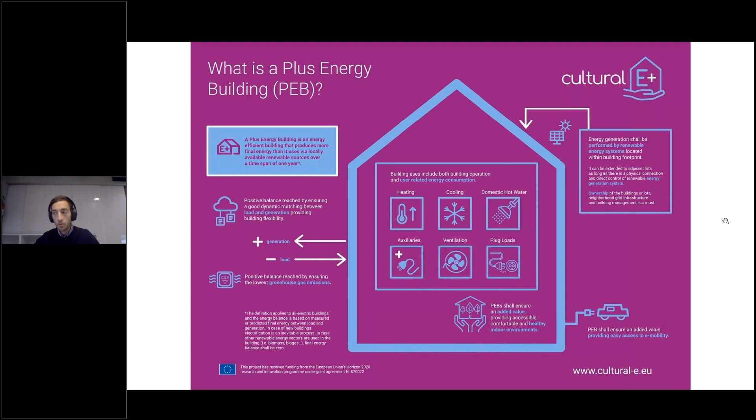Moving forward, you will hear in the next presentations, and in the project in general, about the geoclusters. What we mean by that is the subdivision of the European Union area into four geoclusters, a division to simplify and represent the entire territory, not only according to the diversity of climatic conditions throughout Europe, but also taking into account cultural and social aspects.

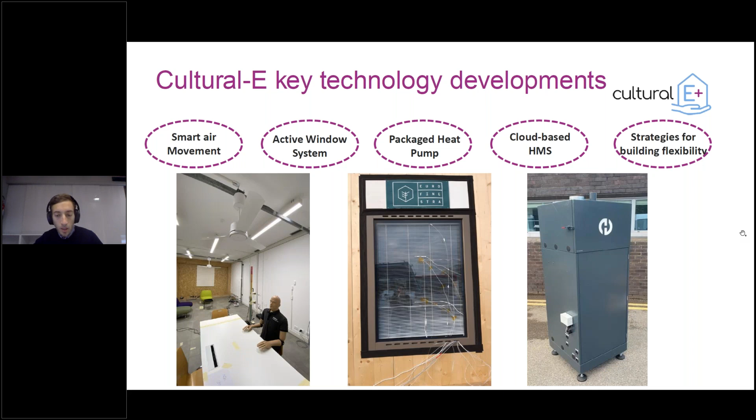I will go through them very quickly to give you an idea of what we mean. As you see, it's very intuitive. By smart air movement, we mean the possibility of using simple technologies like ceiling fans, but in a smart way, controlled by smart, innovative algorithms that can change the speed of these fans so the user inside can be comfortable even at higher cooling set points than usual in summer conditions.

We ran tests in our laboratories using mannequins, real people, and also simulations. There was clear evidence that it's possible to use these technologies to really decrease the cooling need by having a higher acceptable cooling set point. So this was one of our key technologies considered in the project.

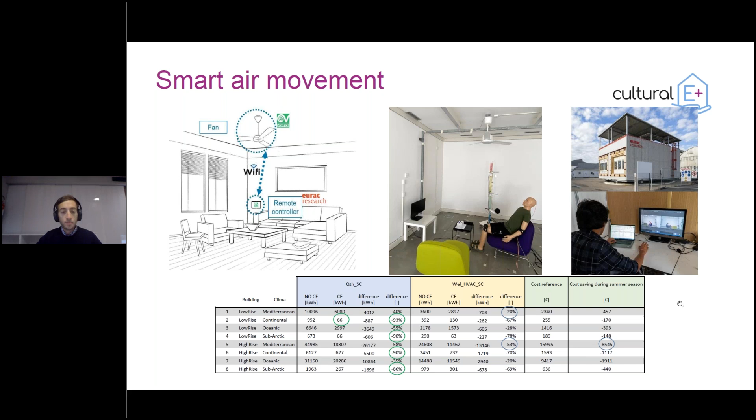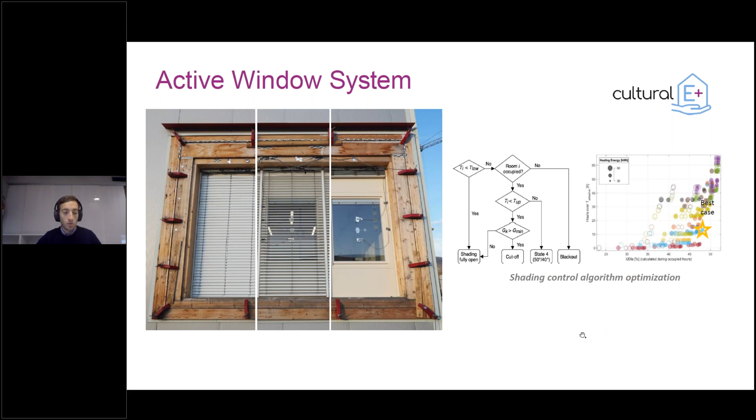This was really helpful because by managing it in a smart way, it's possible to lower consumption while ensuring good comfort conditions. But our active window system isn't only able to control solar gains — we also considered, as you see here, a couple of configurations, though there are many other possibilities, in which we take advantage of the cavity to preheat air or provide fresh air within the indoor environment, using passive technologies like trickle vents or natural ventilation, or active ones like ventilation machines.

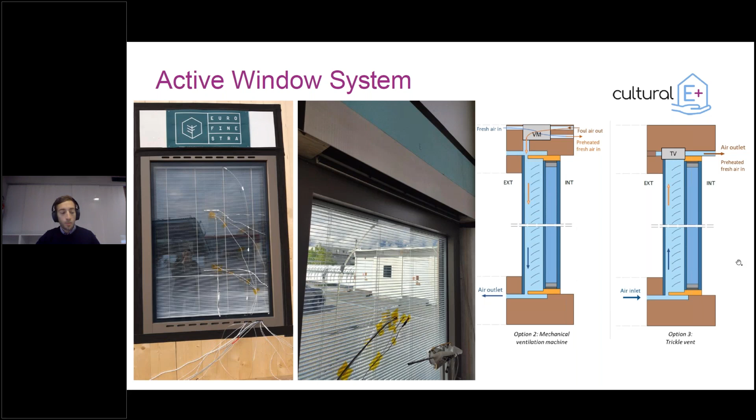This is very tricky to simulate and know how it will behave. So what we have done is actually build prototypes. We now have this prototype installed in our Eurac laboratories, and we are testing them, measuring temperature and heat fluxes to understand the real performance of this kind of active window system in a real environment. This was another of our key technologies to push a bit more the behavior of the windows.

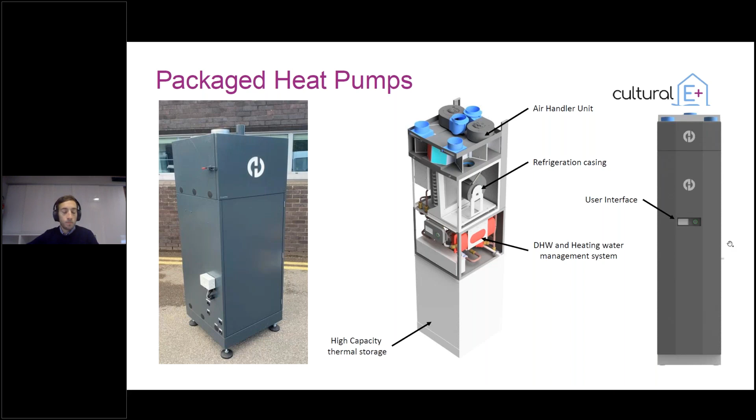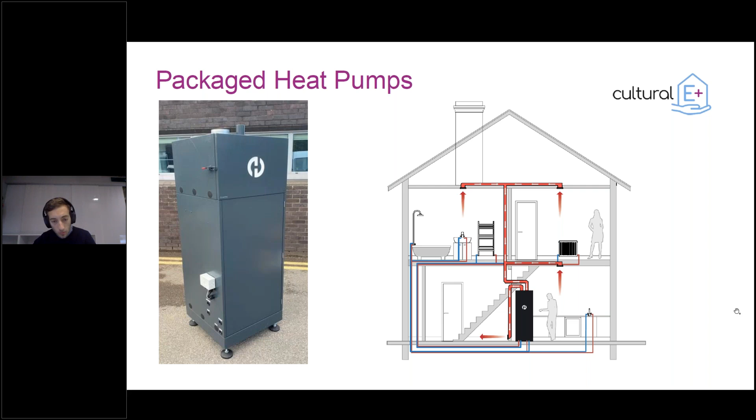Then the third technology considered is the packaged heat pump. This one is more intuitive to understand. It's a heat pump in a very compact manner that can serve a household, providing domestic hot water, heating, cooling, and ventilation — taking care of everything needed within a household, and packaged so you can use one unit and install it in a single apartment or household. It's a very nice solution for decentralized HVAC and production of hot water.

Apart from that, maybe more intangible but very important, we also consider the cloud-based house management system and building flexibility. The cloud-based HMS is a house management system with enhanced capabilities. Being connected to the cloud, it's possible to share more information among the different technologies and also retrieve information from the internet — think, for example, about weather forecasts. So it can be a very powerful tool to better manage the building.

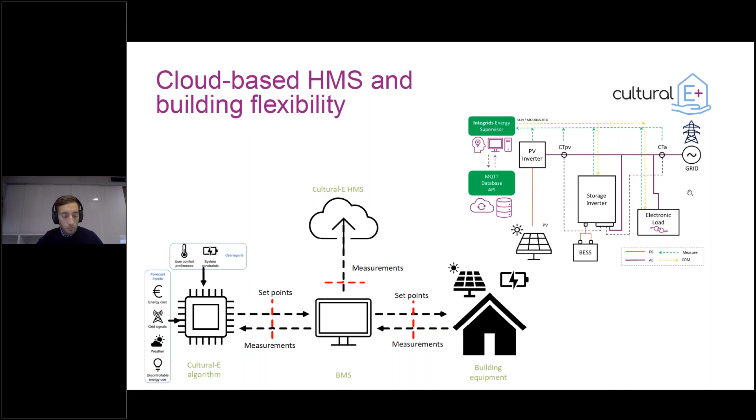So these are the five main key technological solutions we considered. And when we talk about solution sets, that is no other than a set of these technological solutions among others, because these are the key ones on which we focused. But of course, then we also needed to take into account the other solutions, such as the PV production itself, the thermal energy storage, the battery energy storage, the more traditional HVAC system or mechanical ventilation.

But you have to imagine that all our key technological developments, plus all the other needed technological tools to control our building, needed to behave in the best possible way. So each one has to have its own controller and control strategy in a way that it works properly, but also to interact and communicate with each other in order to behave in a holistic way, in the best way possible. So that's why we talk about solution sets. So having a set of technological solutions that work together to provide the best possible comfort condition with the minimal energy consumption.

And that's why also in the next presentation, Francesco Turrin is going to talk to you not only about the solution set and the simulation we have carried out to foresee what can happen in these buildings, but also about harmonized control strategies. So control strategies that can have all these technological solutions work in the best way possible all together.

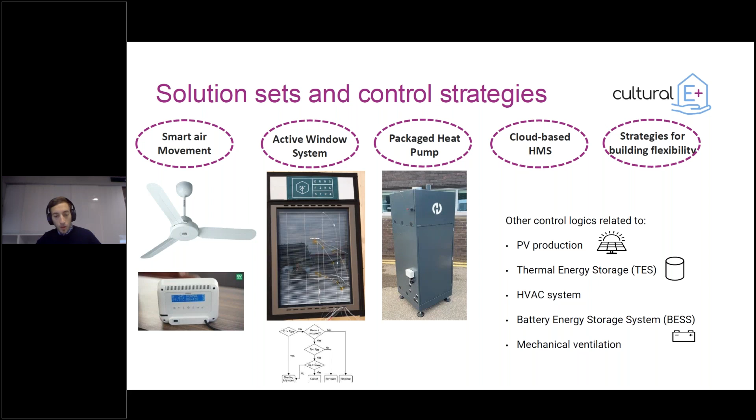So I would like to close. So yes, just a brief reminder about the next presentation. As I said, Francesco Turrin is going to present to you more in detail what we have done to simulate the energy performance of some archetypes, but also how we developed harmonized control strategies to have all these technologies work together in the best possible ways. And as introduced before, afterwards you will also hear about LCA, LCC, and new business models.

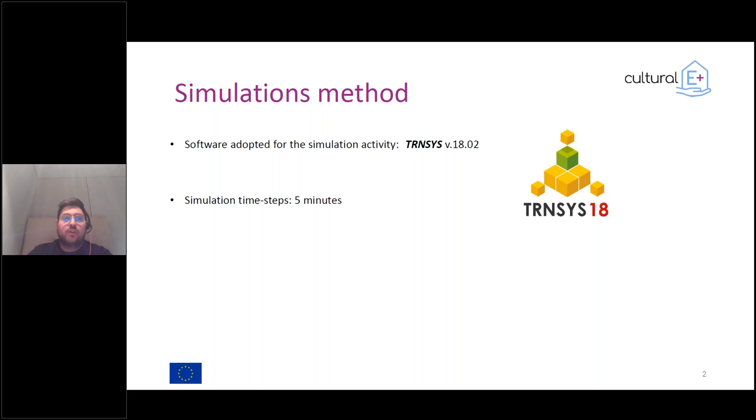Okay. In the project, we consider two reference buildings as building archetypes. On one side the low-rise building, which is a building with 3 floors and a net area of about 650 square meters. On the other hand, we have a high-rise building which has 7 floors and a net area of roughly 3,000 square meters. To consider different geoclusters, we considered different thermal transmittance values for both external walls and the windows, and these coefficients come from the laws of the specific countries.

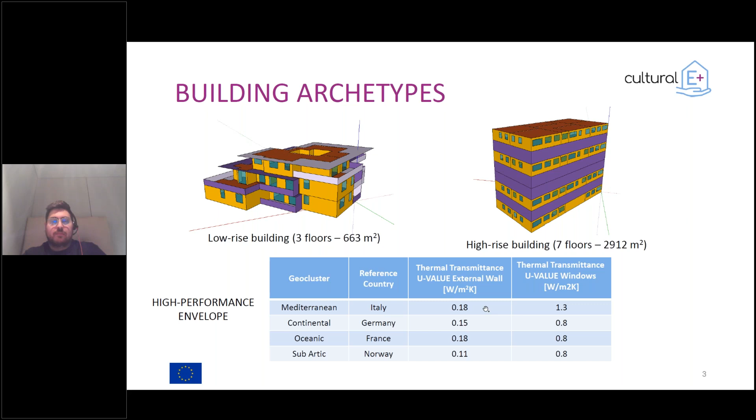The results you will see only represent this solution set, which is a centralized air-to-water heat pump system with all the technologies already presented included in the simulation. So we have a centralized air-to-water heat pump that provides domestic hot water, space heating, and space cooling. The heat pump is connected to either a thermal energy storage for domestic hot water or a smaller buffer for space heating and space cooling. As emission units, we consider fan coils, then we have ceiling fans for air movement, a decentralized ventilation system, Venetian blinds as shading system, then we have the PV with its batteries.

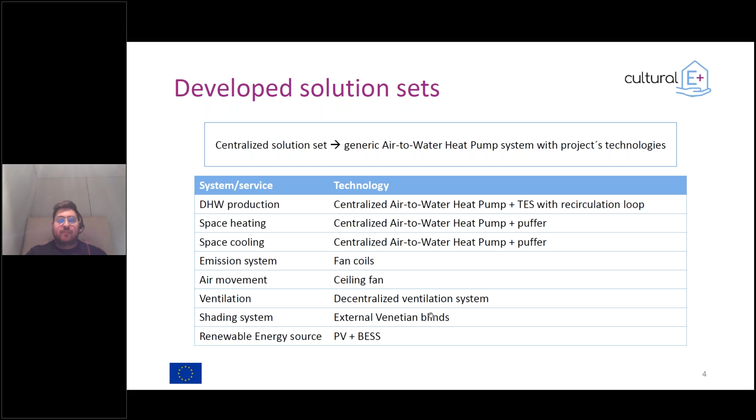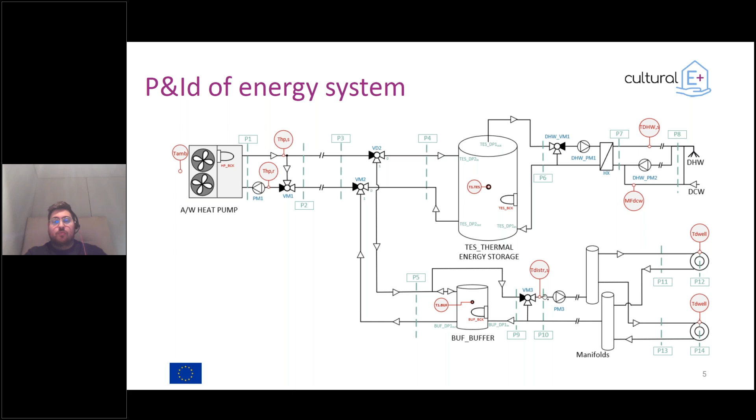So this is what the P&ID looks like. We have the heat pump, which feeds both the thermal energy storage for domestic hot water and the buffer for space heating and space cooling. For the domestic hot water distribution, we have a heat exchanger which allows us to decouple the primary circuit from the secondary circuit, and this helps in reducing the risk of Legionella while keeping a temperature which is not that high in the thermal energy storage. For the space heating and space cooling system, we only have technical water, so we don't see any heat exchanger, but we have a mixing valve which allows us to define the distribution temperature.

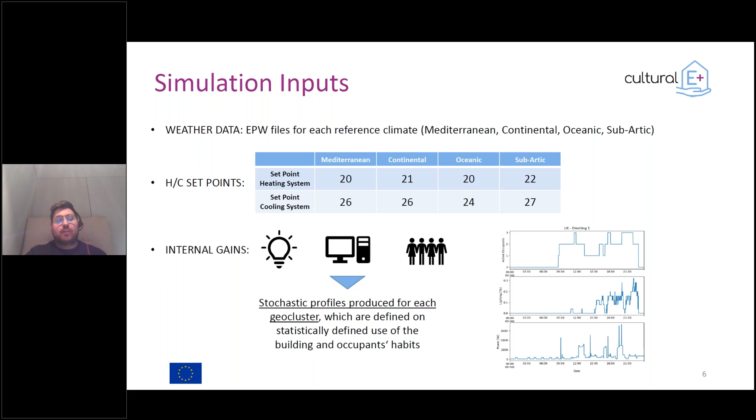For what regards other boundary conditions, we have the weather files, which were taken from EnergyPlus weather files for each reference climate. We had to define some set points for the different geoclusters, and those parameters were provided to us by the partners. While for what regards the internal gains, so for internal gains, I mean the consumption we have due to plug loads, lighting, and the occupancy profile, they were created according to stochastic profiles.

Okay, so talking about the control strategy, our goal was first of all to find a way to harmonize different components. Meaning that each component, like the ventilation and ceiling fans and whatever, has its own control, which is included in the component itself. And all these different control strategies should be taken together to create a unique control strategy that works in every condition. Then, of course, we have to guarantee the thermal comfort and air pollutant comfort for the user.

We should also be able to adapt to some variation imposed by the user. For example, what happens if a user wants to open a window? So how does the system react to this change in the boundaries? And then we also try to optimize the system performance and to shift the load in order to be sure that we were able to match renewable energy sources production and the consumption of the building.

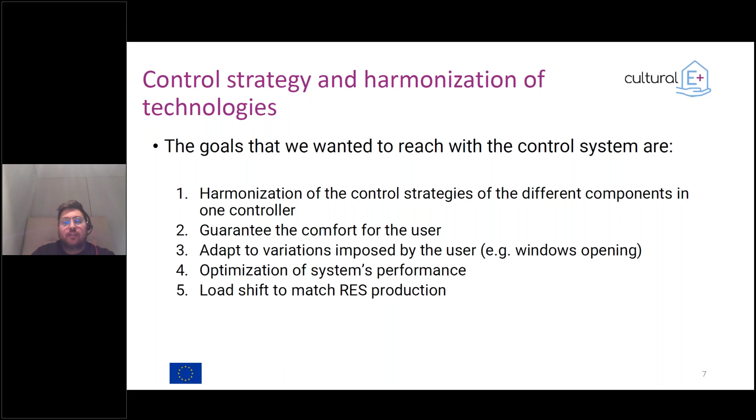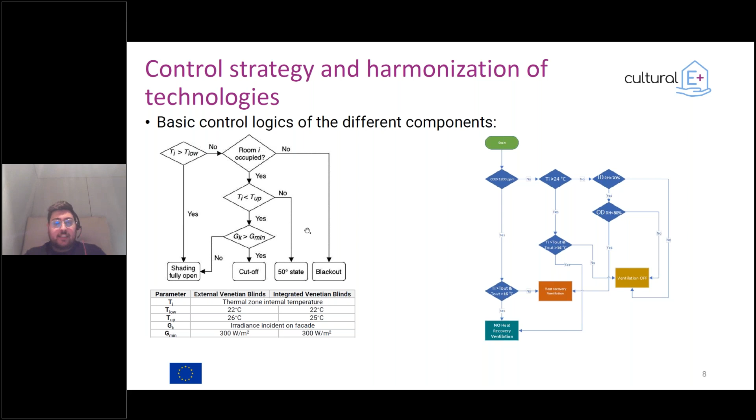Okay, so as I was saying, we have different components within the system which have their own control strategy. So here you have two examples, for the ventilation on the right side and for the shading system on the left side. So what we can do is to implement a centralized controller that takes, on one side, all the information coming from different sensors, and on the other side, we have both the provided control signal and the feedback signal. So the controller should be able to combine what is on the sensor side and what is on the different component side and try to understand what is the best thing to do.

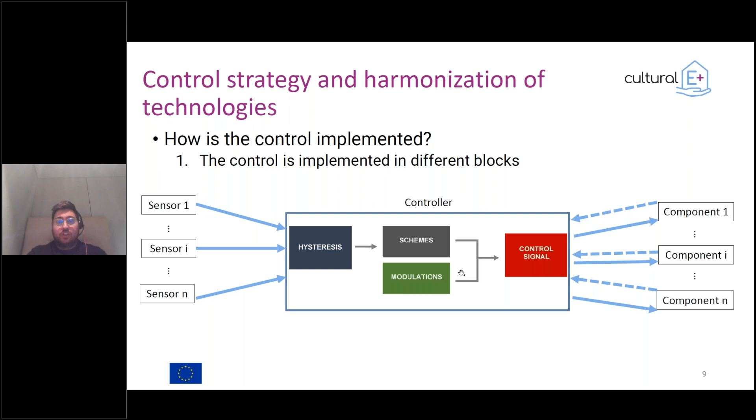The controller itself, it's nothing fancy. So we have a block-based controller, which has hysteresis, schemes, modulation, and finally control signal. So what happens is that once we have all the signals coming from the sensors and the different technologies, we can combine those with some thresholds to define what is the actual status of the system. And by combining those hysteresis, it is possible to define different working schemes. For example, the heat pump should work to produce domestic hot water rather than space heating or space cooling.

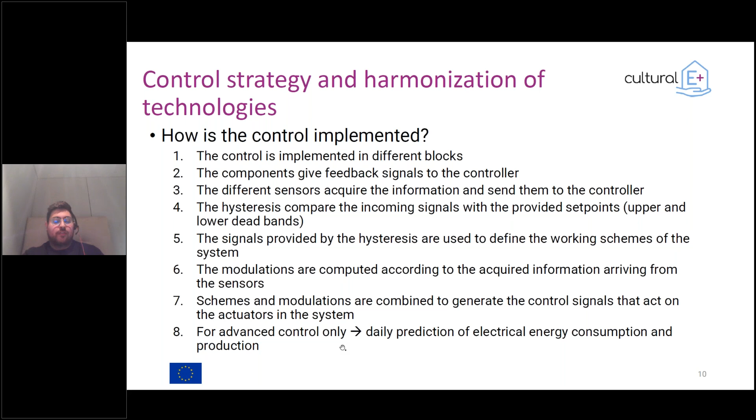And this is not sufficient because we also need to modulate. So each component must modulate, like for example the pumps, valves, etc. So by combining the modulation with the schemes, we are able to define what is the control signal to provide to the component. And a further step that we did is that we tried to predict what is the electrical consumption and the electrical production of the building and the PV system for each day.

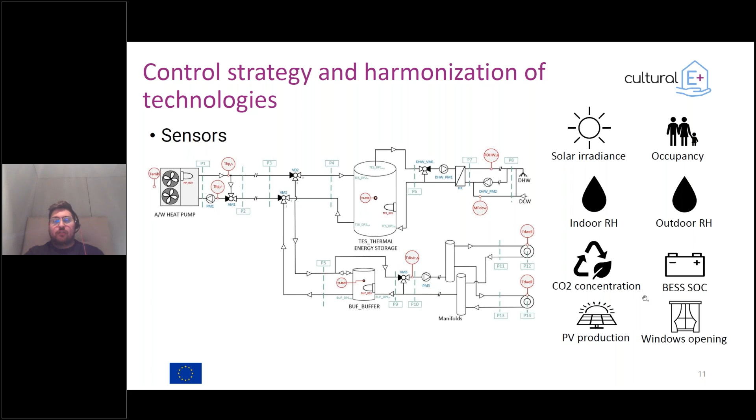Sorry, this is just an example of the different sensors that are taken into account. So we have some sensors regarding solar irradiance, occupancy, indoor and outdoor, both relative humidity and temperature, the concentration of CO2, the state of charge of the battery, PV production, and the opening sensor on the windows.

So when we speak about harmonization, what we mean is that, as already said, we have to define what the system should do when something changes in the boundary conditions. So for example, when the window is opened, what we do is to reduce the set point of that room, and this way we are avoiding wasting energy. Something similar is done when the ceiling fans are activated, meaning that we have a higher air movement, and so to grant the same thermal comfort, it is possible to increase the set point a bit, thus reducing the thermal energy provided by the heat pump system.

Then, of course, the battery tries to prioritize the direct use of electricity, meaning that if we have a load and we have PV production, we're not trying to store this energy, but we try to consume it directly.

Then the set points of the heat pump can also be modified according to what is happening to the system, meaning that, as I already said, we had a mixing valve which regulates the temperature we are giving to the distribution. And so what we can do to optimize the system is to let the heat pump try to follow this set point so that we don't have an excess of energy production or produce less energy than we need.

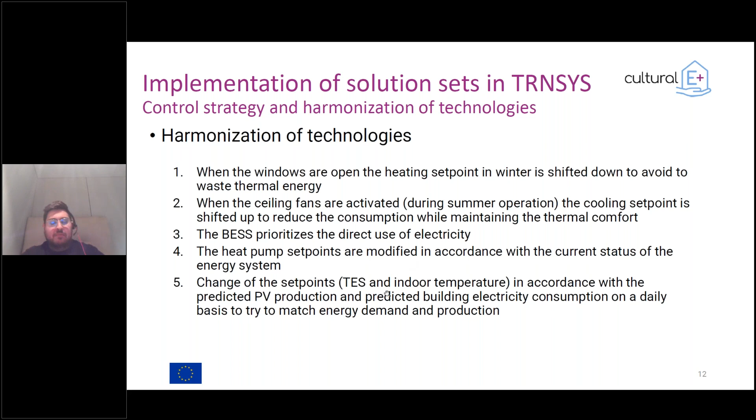How can we achieve thermal inertia? Either we increase the size of the thermal energy storage, or we act on the thermal mass of the building itself. So for this control strategy, we tried to understand if it is possible to define a correlation between the total electrical consumption of the building and the external temperature, which in this case is correlated to the heating degree days. So for each geocluster and each climate, we ran a simulation with a normal controller and tried to understand what this correlation is, if there is one.

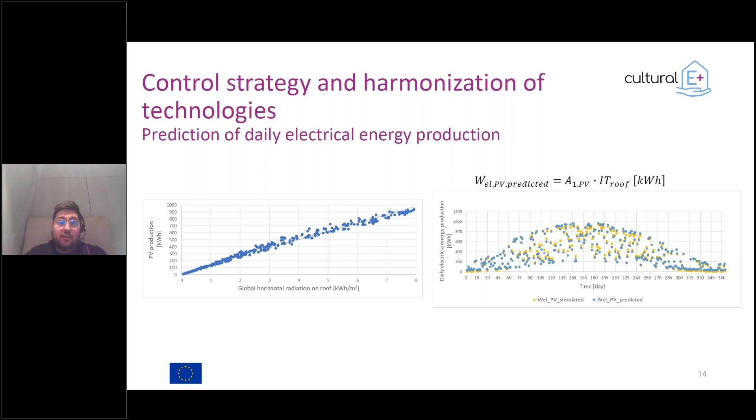So the idea basically was that, as already said, when we have an excess of energy production today, we can store this energy to be used the next day. The same thing is done for the electrical production. Here we have the electrical production of the PV as a function of the global horizontal radiation on the roof, and as you can imagine, it is basically a one-to-one relationship. And what we end up with is something like this.

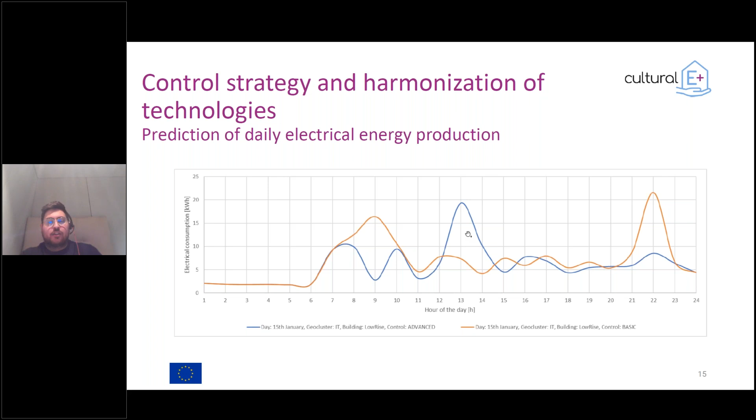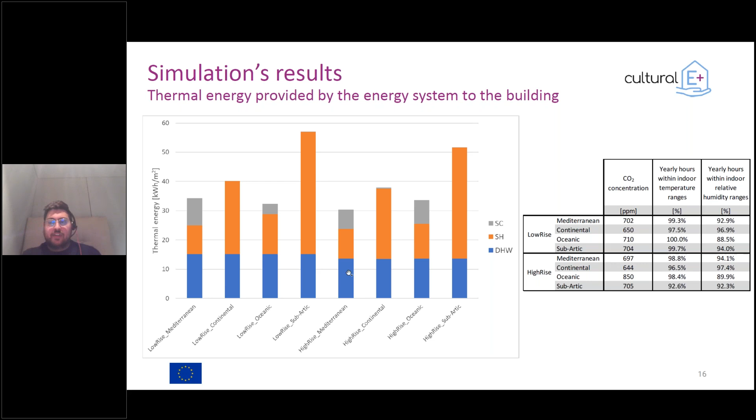Another important thing to see is that if you compare the low-rise building with the high-rise building, you see a decrease of the energy consumption, and this is mainly because of the lower S over V ratio, meaning less losses.

So from this, what we can actually work on is the consumption of the heat pump itself. It's about between 20 and 30% of the overall consumption that we can work on.

For the high-rise building, we see more or less the same thing, but overall, again, we have a lower consumption.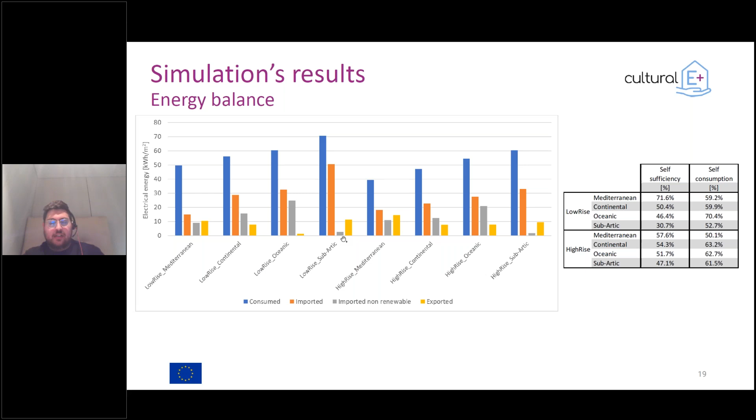This means that the size of the PV we chose is not sufficient to grant 100% self-sufficiency of the building. However, if we only consider the non-renewable part of the imported energy, then in more than 50% of the cases this is a plus energy building. For the Mediterranean case, this is due to the energy production of the PV. For the subarctic case, the non-renewable energy is really low because the energy mix we considered is basically almost 100% renewable, so we have no fossil energy coming from the grid.

To conclude, we can say that it is possible to reduce the total consumption of the building by implementing a control that harmonizes the different technologies, and that the thermal energy system proposed is able to provide the correct ranges of temperature, relative humidity, and air quality.

For both continental and subarctic climates, basically we don't have any space cooling demand, because the little demand we have is covered by air movement. So by using a ceiling fan, it is possible to avoid including space cooling in the centralized system.

In each application, most of the electrical consumption is due to plug loads, which are difficult to reduce or shift in time. So to further reduce the energy consumption, user awareness is fundamental.

The advanced control strategy is able to shift the load by matching energy production and energy consumption. But to do so, first of all, we need to increase the thermal inertia of the building. In any case, we are not really able to reduce the total energy consumed.

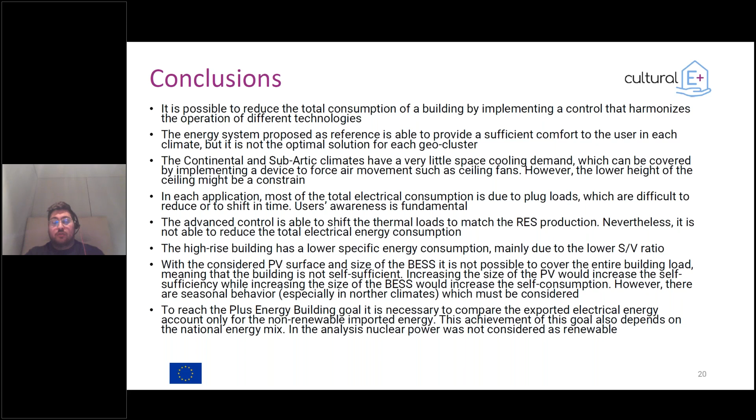In northern climates, we have most of the consumption for space heating during winter, when we don't have so much sun, and it is not possible to shift the production of PV from the summer season to the winter season. To reach the plus energy building goal, considering all the consumption including ventilation and plug loads, we cannot compare with the total energy imported from the grid, but only with the non-renewable energy withdrawn. So thank you for your attention, and we can go through the first poll of discussion.

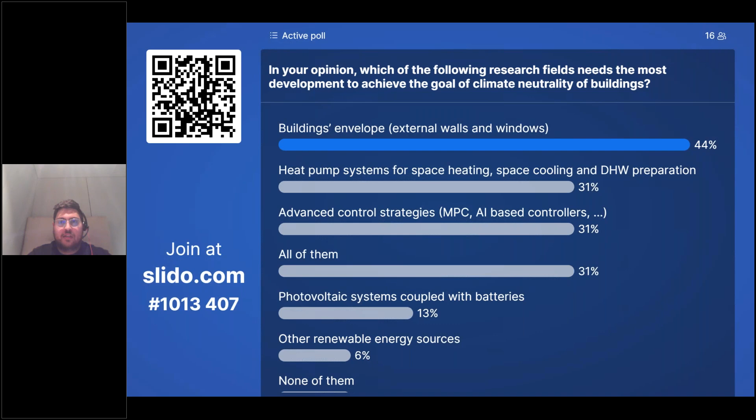Today I will present some outcomes of Cultural E regarding the environmental life cycle assessment of plus energy houses, and more specifically regarding the solution sets just discussed by Francesco. There was the last question regarding climate neutrality, reducing global warming, which is the current big and really relevant societal challenge, and we know that according to the Paris Agreement we should reach carbon neutrality by 2050.

Passive and zero energy buildings can offer new perspectives in this context, and plus energy buildings are a step forward compared to net zero energy buildings. They are also able to decrease operational energy consumption, but on the other hand, as we just saw, there is an increased amount of materials and installation components. Finally, there is an increased amount of surfaces aimed at photovoltaics, batteries, and further control strategies—other elements related to installation components.

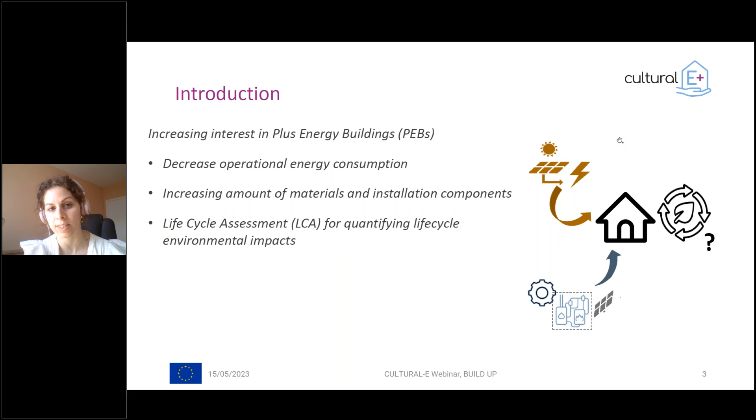Since we are adding new materials and new components, it's important to trade off this energy-efficient solution against their environmental potential. In this sense, it's important to use reliable tools, such as life cycle assessment, for quantifying the life cycle environmental impact.

In Cultural E, we developed an approach. We started by following the cultural activities—namely the development of the key technologies of Cultural E—and by following this development and collecting the experience of technology developers and building designers, we started with the LCA of technology from the bottom, the lower level. Then we developed a parametric LCA for solution sets, the second level, and finally we carried out life cycle assessment on concrete, actual buildings—Cultural E demo cases—so a complete building LCA.

Since we are carrying out three different LCA analyses—technology, solution set, and lastly plus energy buildings—we also have different goals and scope of analysis according to the framework of life cycle assessment, the ISO 14044. When looking at the Cultural E technologies, the goal of the analysis was, first of all, allowing a comparison of the newly developed technologies with traditional ones, identifying improvement potential, and providing feedback to developers in order to further enhance the environmental performance and profile of their own technologies.

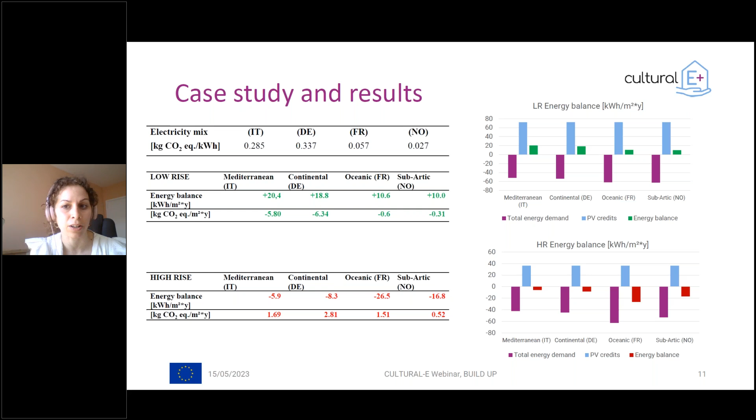If we go back to the previous slides and the first table collecting the environmental profile of the national electricity mix, we can see that France and Norway have a really low-intensity CO2 and energy mix. We are aware that France has a nuclear baseline, while Norway's energy production is mostly coming from hydropower, and these produce really low CO2 emissions.

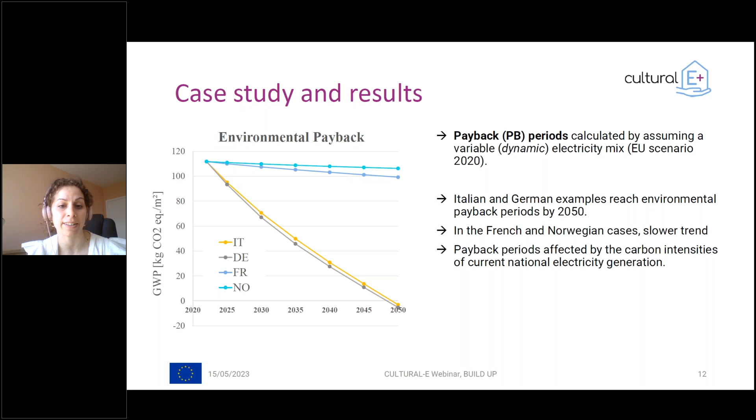In this sense, we can see that the payback period times are, in a first instance, really affected by the current national electricity generation.

When we lastly carry out the LCA for cultural demo cases, the approach is similar to the one presented for the solution set. However, it's important to remind that the solution set analyzed here was developed in a really theoretical way, while for the demo cases we are analyzing actual, not fictive, case studies that have really been located. For that there is a more comprehensive data collection.

We can assess, after this data collection, the environmental potential on the whole building level, and here also explore benefits in their home climate and cultural context.

I won't go really into details on the LCA of the cultural demo cases, because this deserves, in my opinion, other opportunities for disseminating and presenting, with more space and time for a more comprehensive and clearer presentation. But what I can show you here is just another idea of the payback time on the building level.

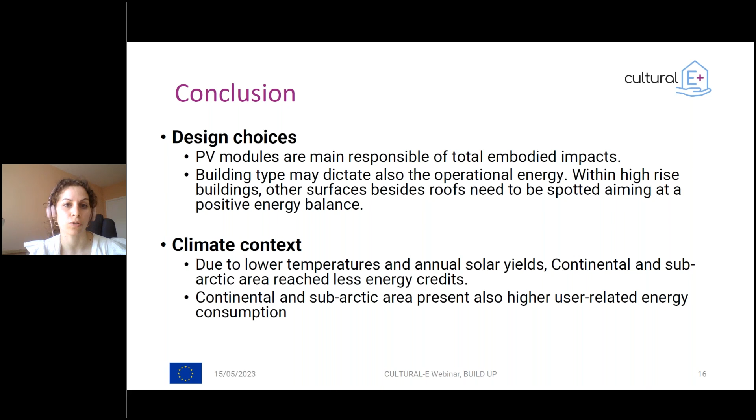And the continental and subarctic area, on the other hand, when we are looking at the appliances, the usage of appliances, has also a higher user-related energy consumption. But this topic should be looked at more in depth further.

Finally, so last but not least, one of the issues that has been analyzed, that has been investigated through these studies, is the effect of the national energy generation. There is, in this sense, higher effectiveness of plus energy buildings, solution sets, in Italian and German context.

So in contexts in which there is a carbon-intensive energy generation, all analysis and observation needs to be, of course, addressed on the building level, and we should also consider in the building health analysis the effect of the refurbishment of the building, which is happening after the 30 years lifespan durations.

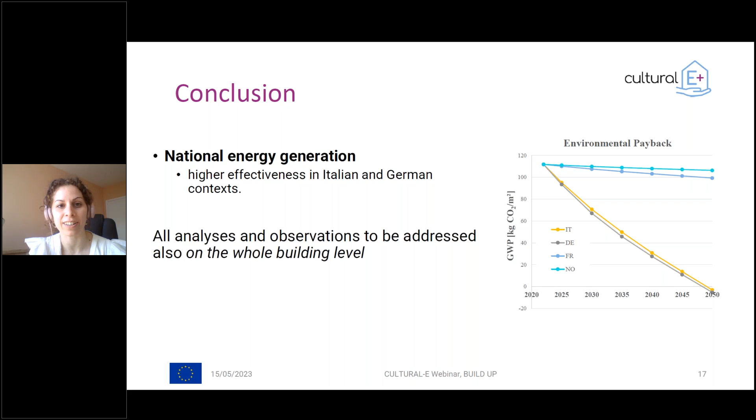And this will be presented, of course, in the future results or future outcomes of our research. I would be glad to show you again the other outcomes of this research. And I thank everybody for your attention.

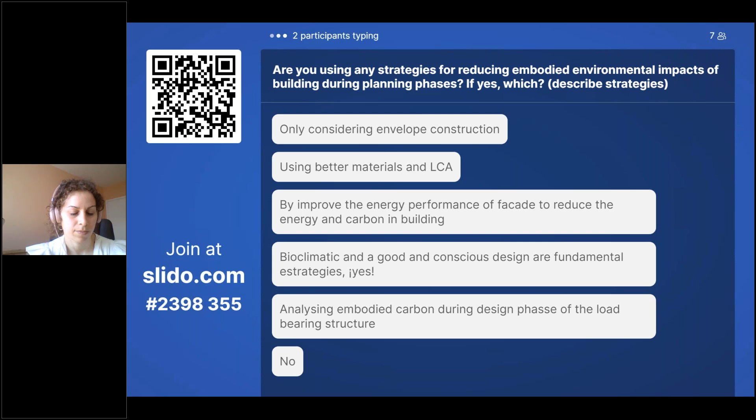So we see that someone is associating embodied impact to the analysis of load-bearing elements. Let's remember that load-bearing elements might be mostly concrete, and concrete is most of the time one of the main responsible factors for total building environmental impact. So it's really important to design load-bearing elements carefully.

I really agree on it. It's really important to design in an aware manner all the concrete load-bearing elements, but also looking at the facade and the envelope, which are also major contributors to the total building embodied impact. In this sense, it's really important to use and integrate life cycle environmental information coming from EPDs or environmental data sets already during the design stages.

LCA, providing a design process accompanying LCA, is one of the main strategies currently being investigated, and it's becoming more and more required in the European context.

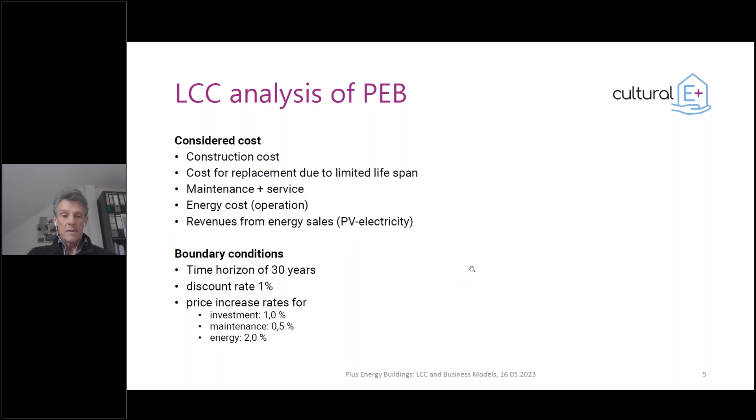So if we look at the results, we look at the total annual costs. This means the total costs are discounted over 30 years, and we distinguish between capital cost, maintenance cost, energy cost, and revenues. Here I will show you the initial investment cost between an exemplary reference building and a plus energy building.

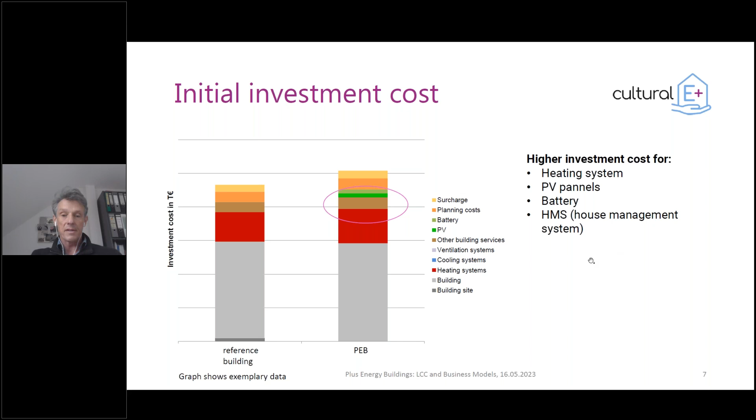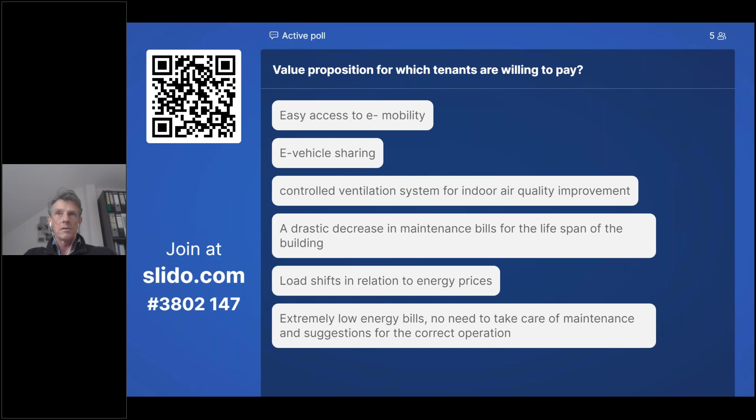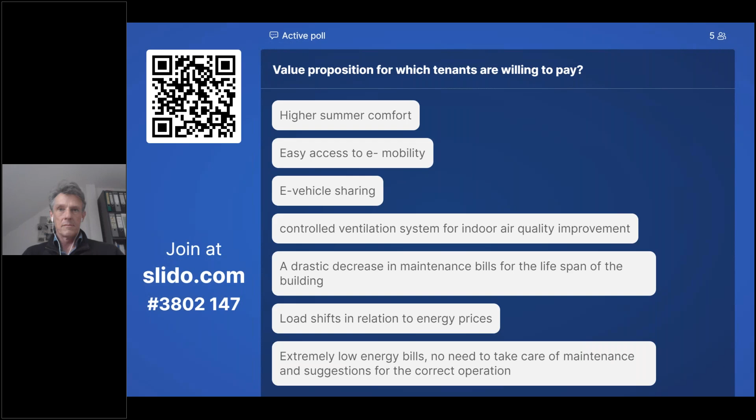Easy access to e-mobility. Yeah, this is also interesting, and concerning the architecture. Okay. Higher summer comfort. I think this is more important in the Mediterranean region than in Norway, but it is a point, higher summer comfort, which can come from the plus energy building. Okay, I think we can close the question, go to the next one.

So as I mentioned, the legal restrictions are different in each country, and I would like to ask you if you have ideas how we can lower the legal restrictions, or which restrictions you think are obstacles for marketing of plus energy buildings.

Improvement in the possibility of sharing energy production among neighbors. I think this is really a restriction we have in several countries, and it's not so easy. And here I think it's something the local government has the possibility to change in the direction of plus energy buildings. Same goal is variable rates for energy fed into the grid. So we can sell it at different prices depending on the need in the grid.